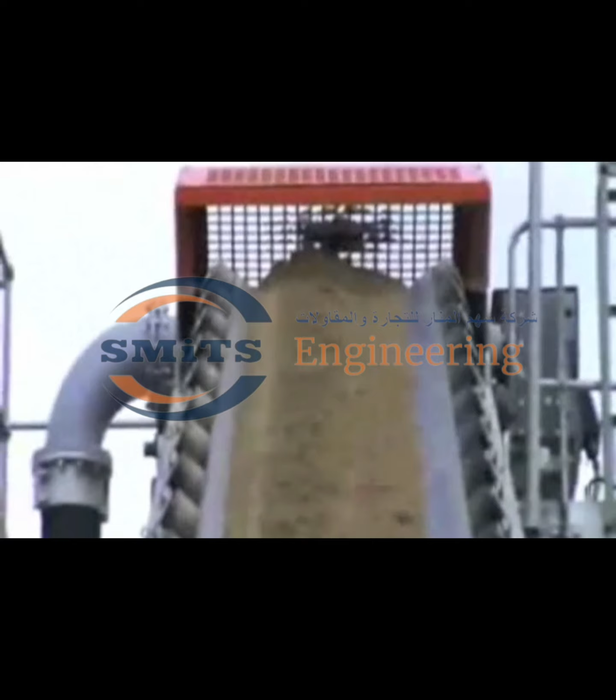AASHTO T2 and ASTM D75 are the standard practice for sampling aggregates.

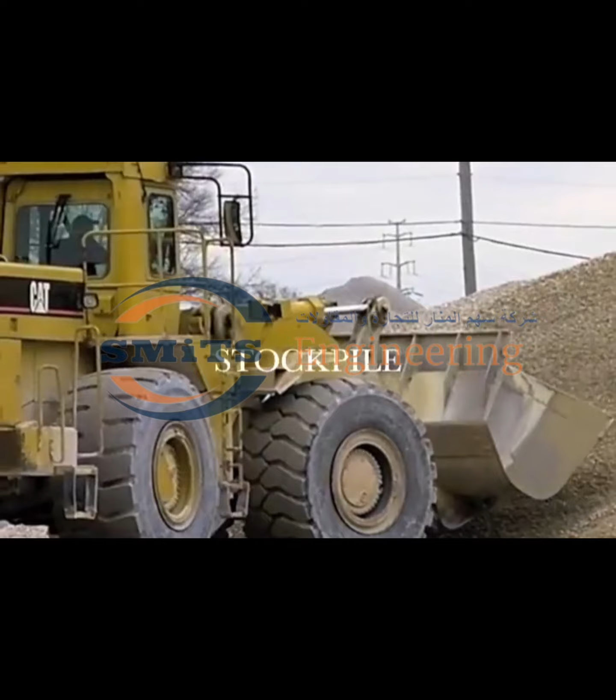Some of the purposes of obtaining samples would include acceptance or rejection of materials, control of operations at the site of use, control of the product at the source of supply, or preliminary investigation as a potential supply.

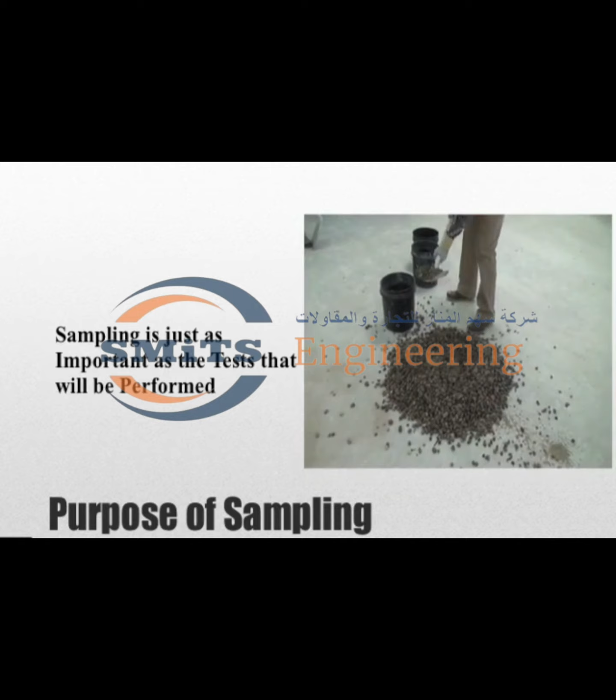Sampling is just as important as the actual testing. Therefore, the person obtaining the sample should take every necessary precaution to ensure that the sample they obtain shows the true nature and condition of the material being sampled.

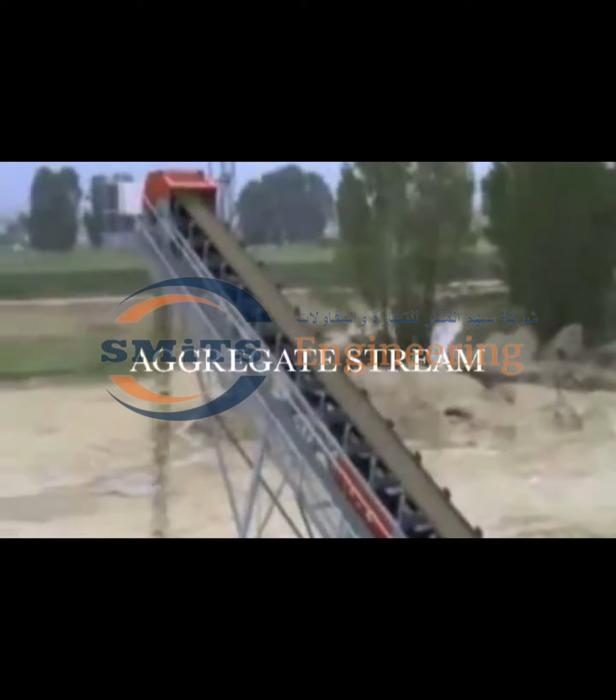There are many locations from where a sample might be obtained, but the four primary locations include a flowing aggregate stream, a conveyor belt, a stockpile or transportation unit, and a roadway from the base or the subbase.

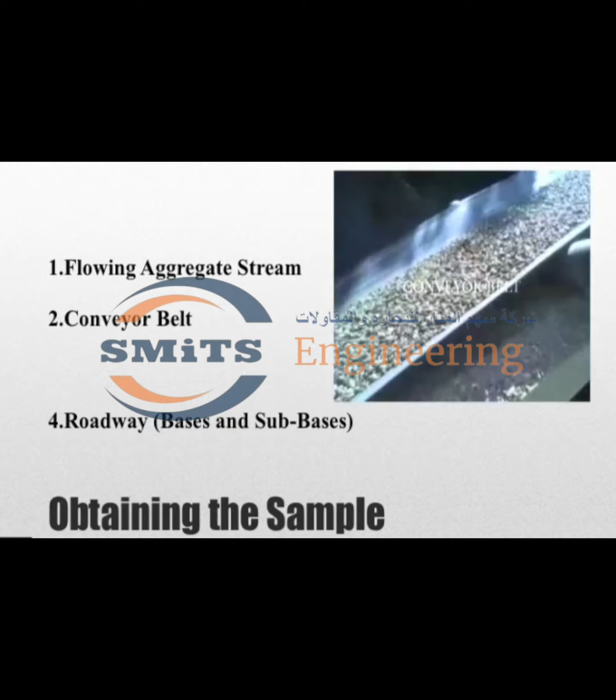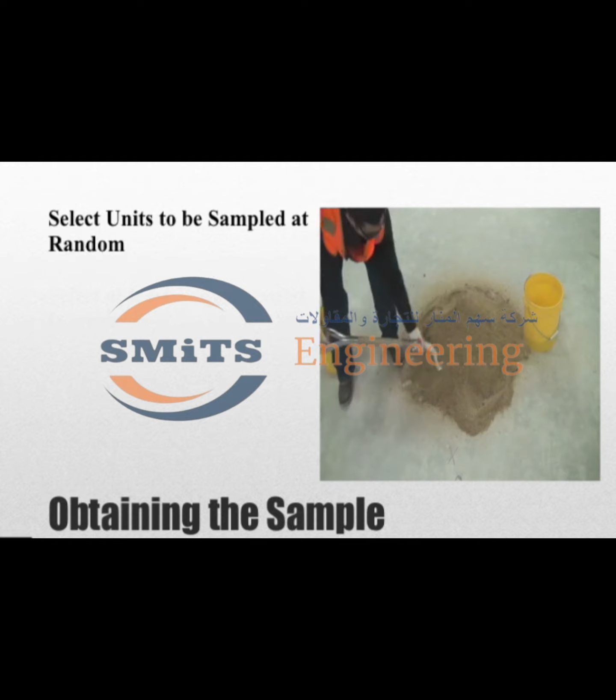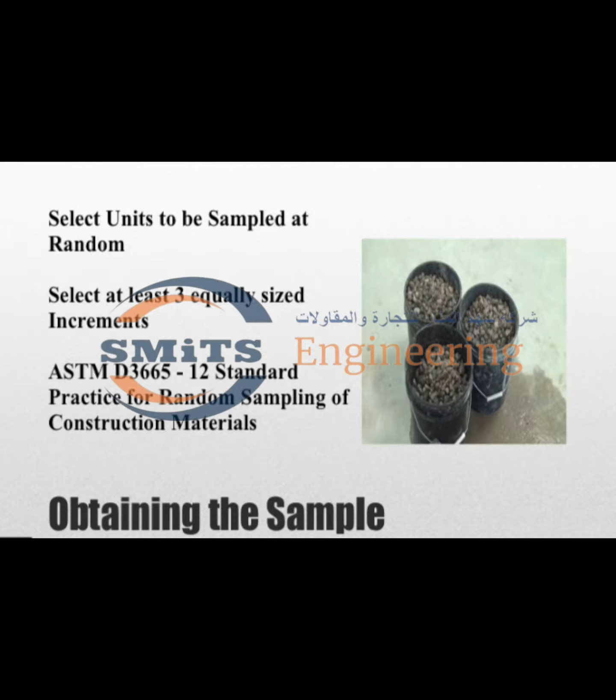Sampling from a flowing aggregate stream, sampling from a conveyor belt, and sampling from a roadway share some commonalities in the fact that the samples will be obtained at random. Furthermore, at least 3 equally sized increments will be selected. If a random sampling plan cannot be agreed upon, ASTM D3665 standard practice for random sampling of construction materials may be helpful.

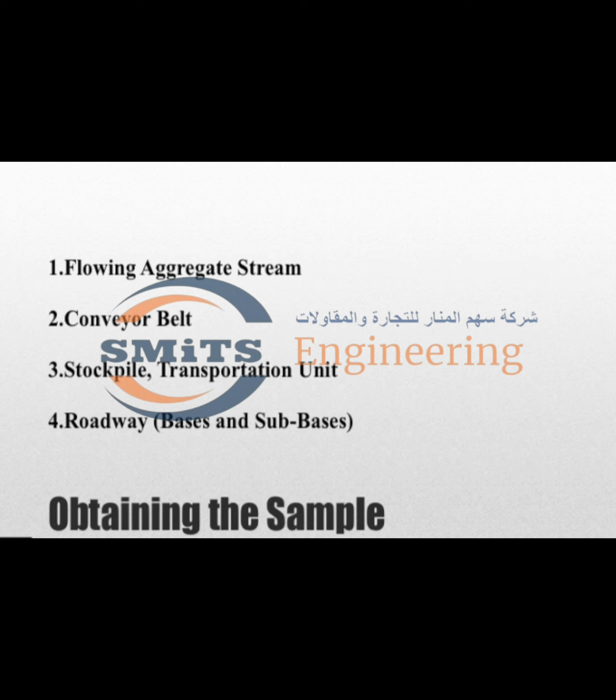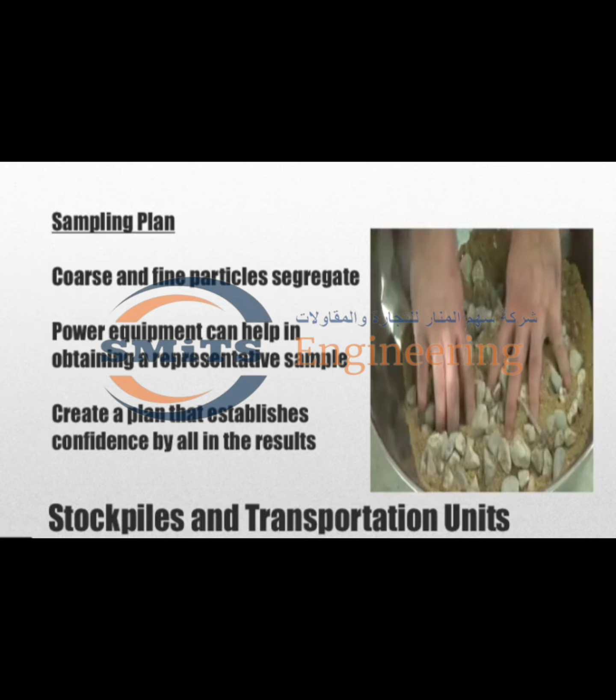When sampling from a stockpile or transportation unit, try to avoid sampling of coarse aggregates or mixtures of coarse and fine aggregates, especially when the sample is being obtained for grading purposes. If the circumstances presented make it necessary to obtain a sample of these types of aggregates from a stockpile or transportation unit, then create a sampling plan. The sampling plan should build confidence in all parties when the results are obtained. Furthermore, using power equipment may be helpful in obtaining a representative sample.

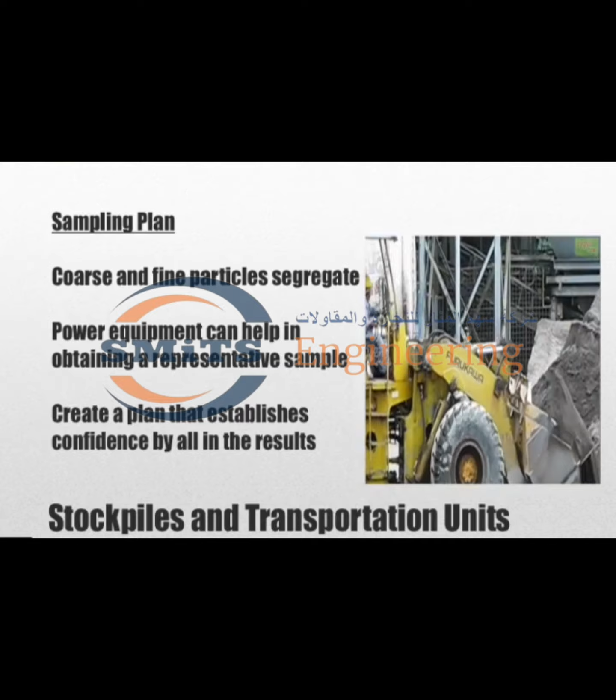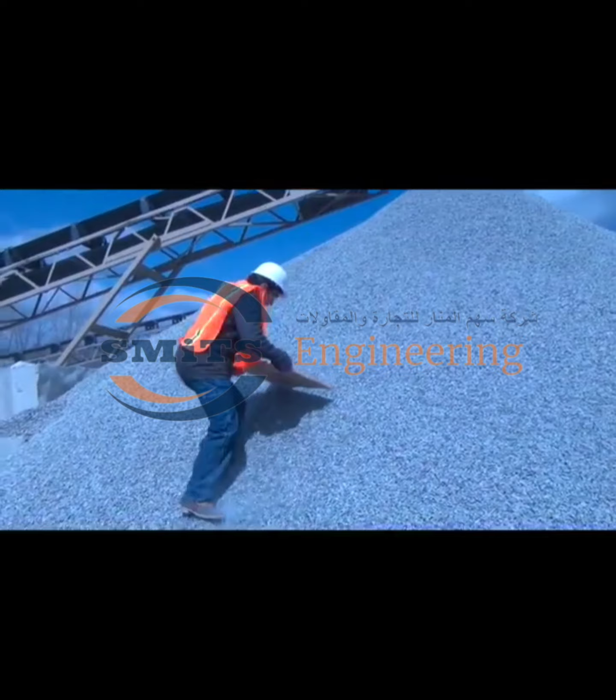When power equipment is not available, samples from stockpiles should be made up of at least 3 increments, taken from the top third, midpoint, and bottom third of the volume of the pile. A board shoved vertically into the pile just above the sampling point aids in preventing further segregation.

The responsibility for obtaining the sample will depend upon the reason for which the sample is being obtained. As an example, the manufacturer and contractor are responsible when the sample is being obtained for control of production at the source or control of work at the site. But it is the purchaser who is responsible when samples are being obtained to be used for acceptance or rejection as a potential source.

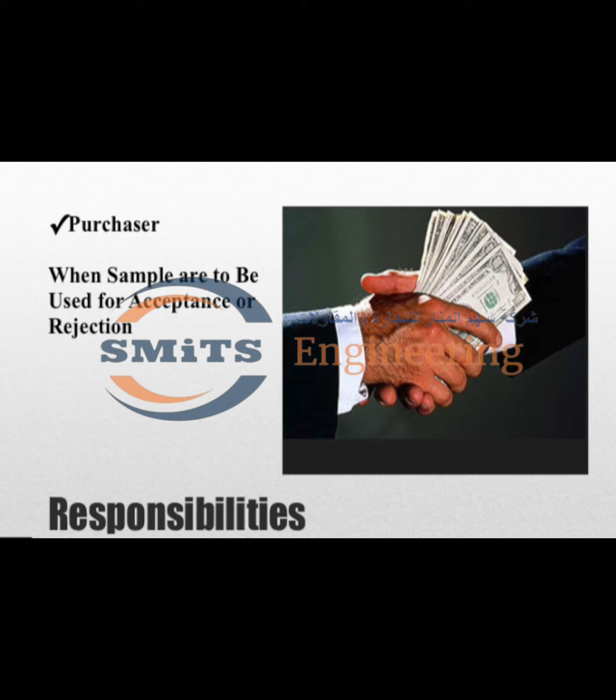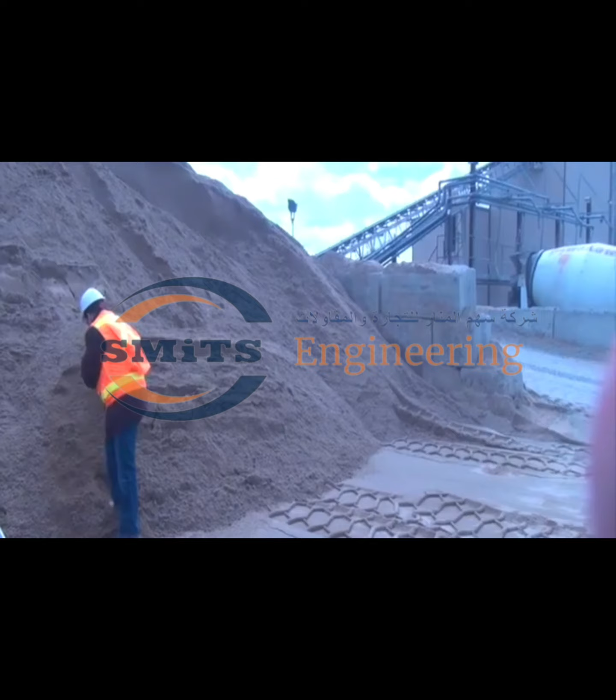And it is the seller who is always responsible for providing the appropriate sampling equipment. And whenever the sample is being obtained as part of a preliminary investigation, the sample shall be obtained by the party responsible for the development of that potential source.

When samples are being obtained for quality tests, it is best whenever possible to obtain that sample from the finished product.

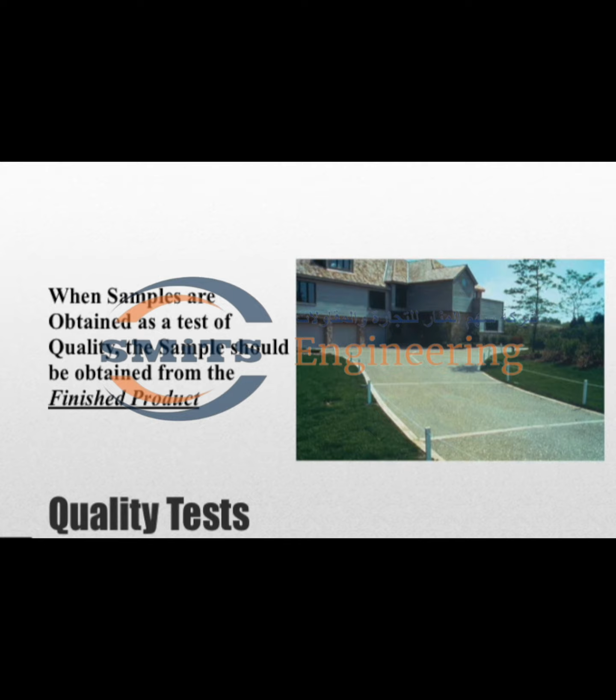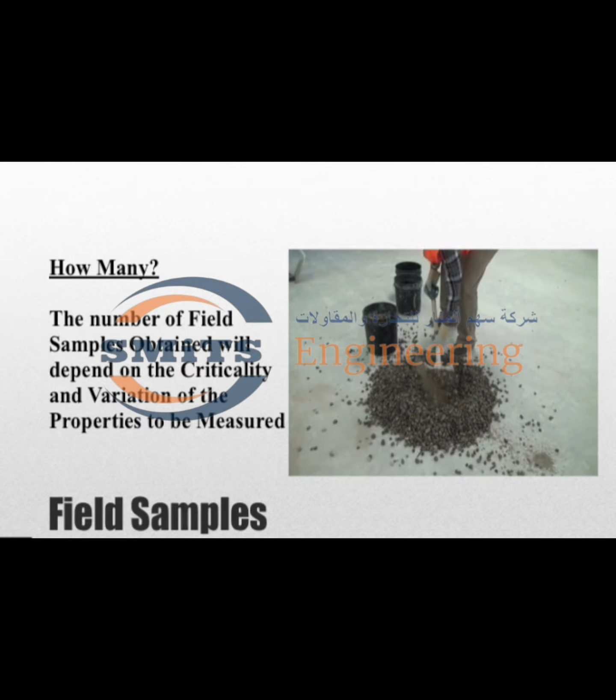The number of samples obtained will depend upon the criticality and variation of the properties that are to be measured. Furthermore, the amount of each sample will depend upon the type and number of tests that are to be conducted.

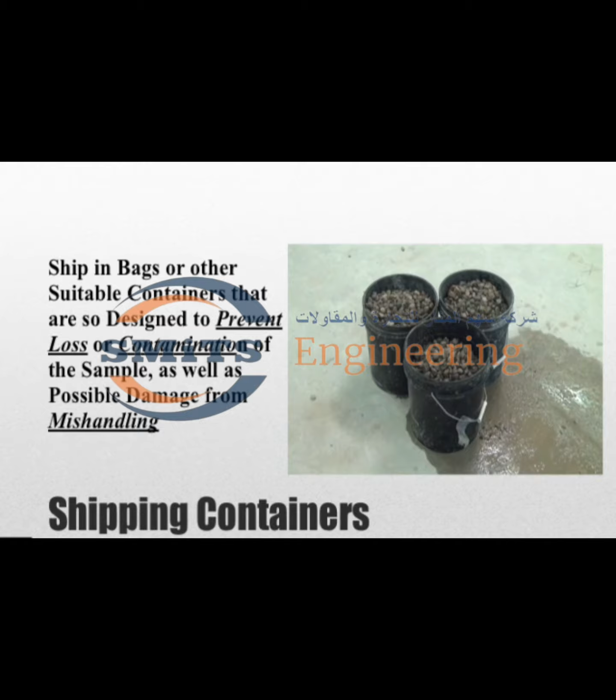And lastly, if it becomes necessary to ship our samples, be sure that they are shipped in suitable containers that are so designed to prevent loss or contamination. Furthermore, we want the containers to be suitable to prevent damage from possible mishandling.

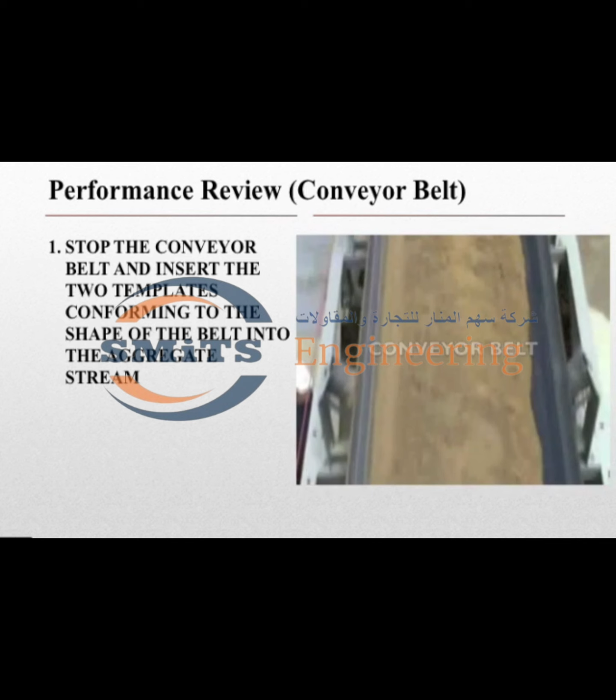Let's now review the key steps of this procedure, beginning with sampling from a conveyor belt. When sampling from a conveyor belt, one of the first things that we must do is stop the conveyor belt and insert two templates that conform to the shape of the belt. Space the templates so that the material in between will yield an increment of the required mass.

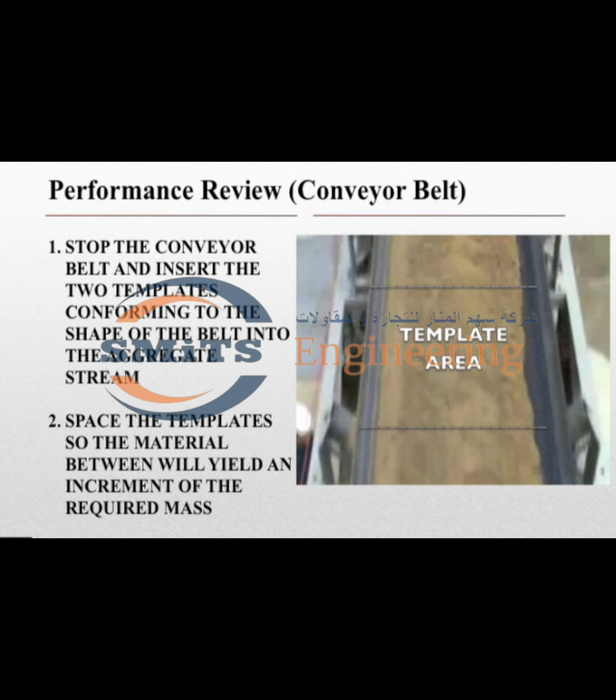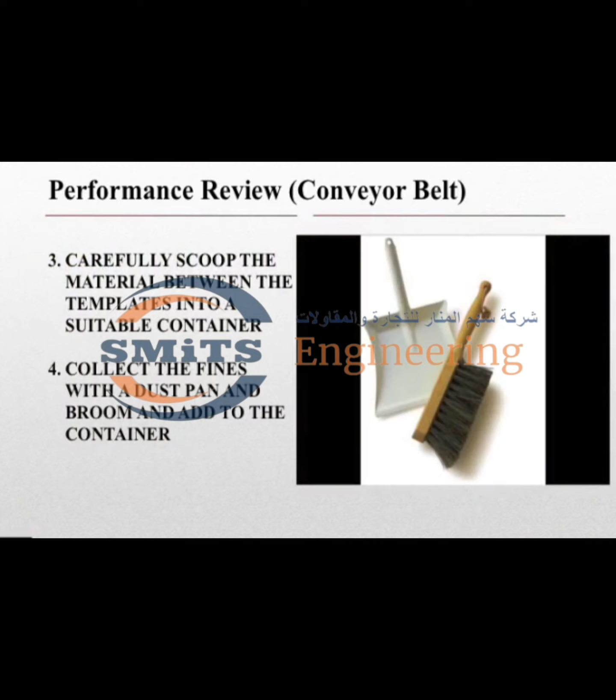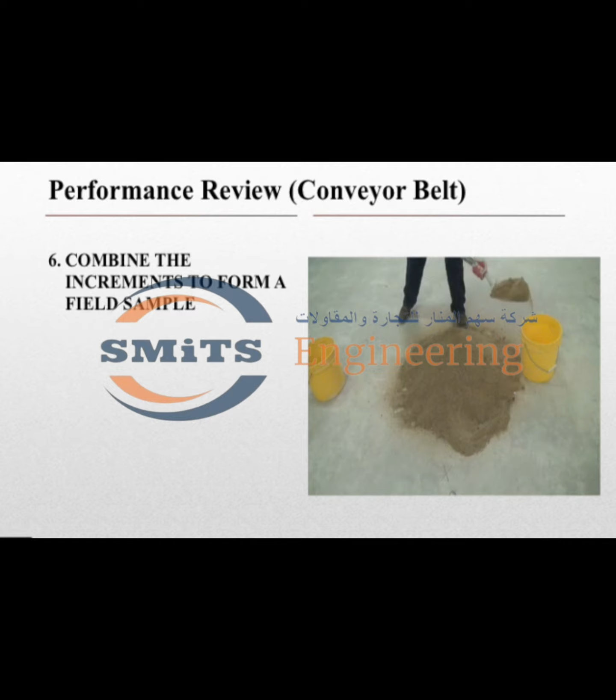Carefully scoop the material in between the templates into a suitable container. You can now collect the fines with a dustpan and broom. Be sure to obtain at least 3 equal increments and then recombine these increments to form your field sample. Lastly, make sure that your sample meets or exceeds that which is required for a given aggregate size.

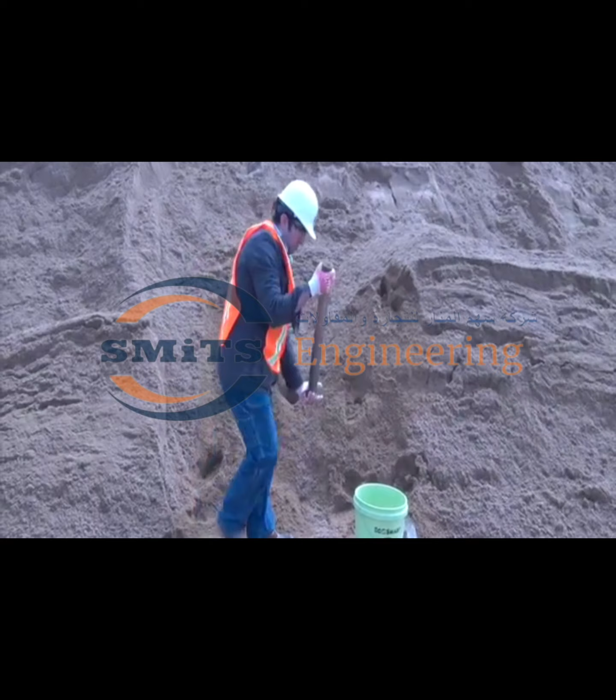Now let's review sampling from a stockpile. This is for fine aggregate only. First, remove the outer layer of the stockpile to expose the material underneath. You can use a shovel or power equipment to achieve this. Insert the appropriate sampling tube. And unlike the other procedures, when sampling from a stockpile, you obtain at least 5 increments.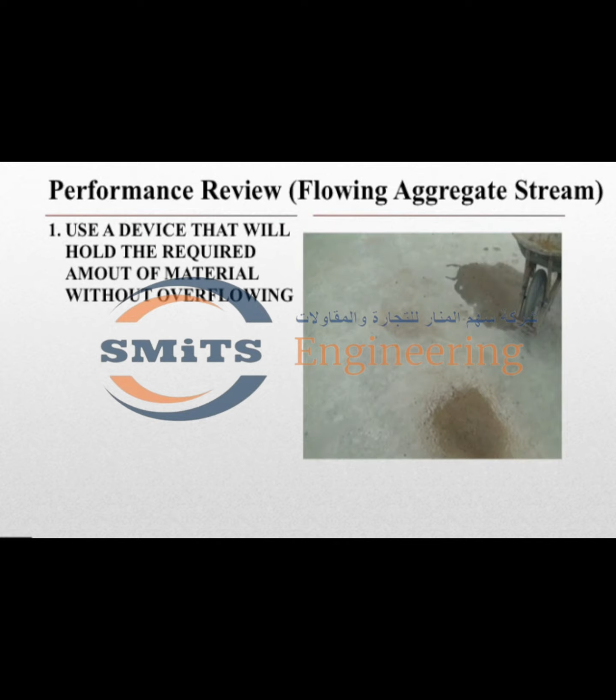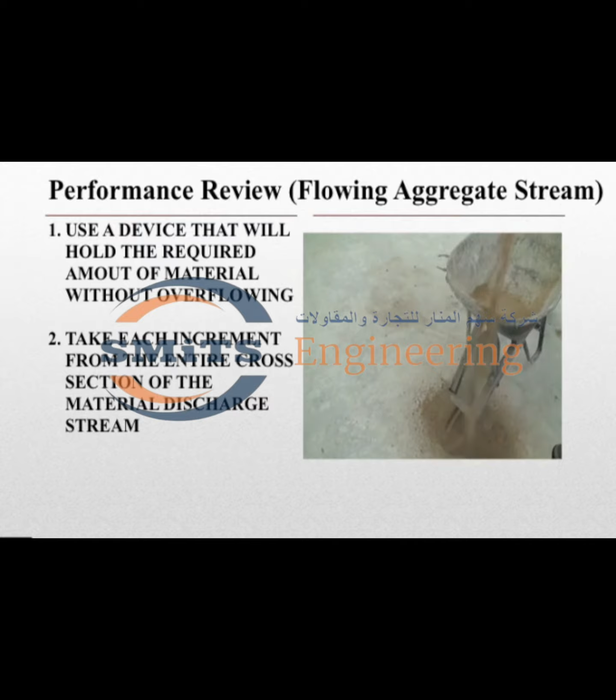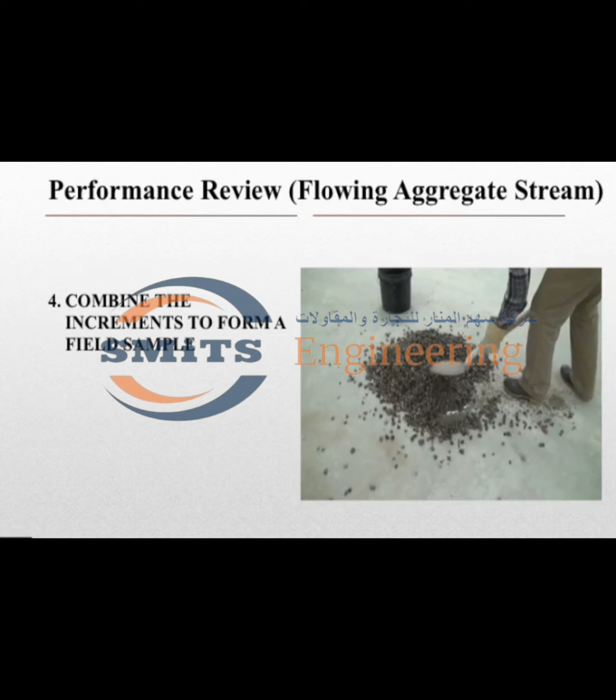Let's now review sampling from a flowing aggregate stream. Be sure to use a device which will hold the required amount of material without overflowing. Take each increment from the entire discharge stream. Obtain a minimum of 3 equal increments. Then, just as before, combine these increments to form your field sample. Then ensure that the size of the sample meets or exceeds that which is required for a given aggregate size.

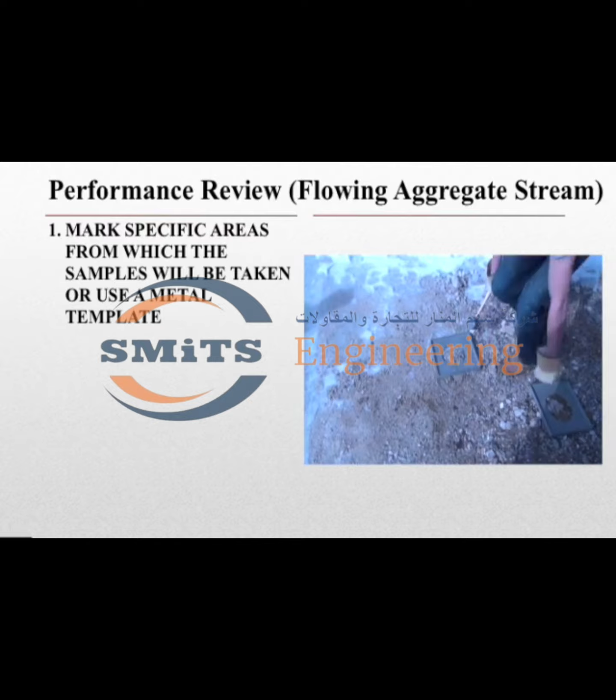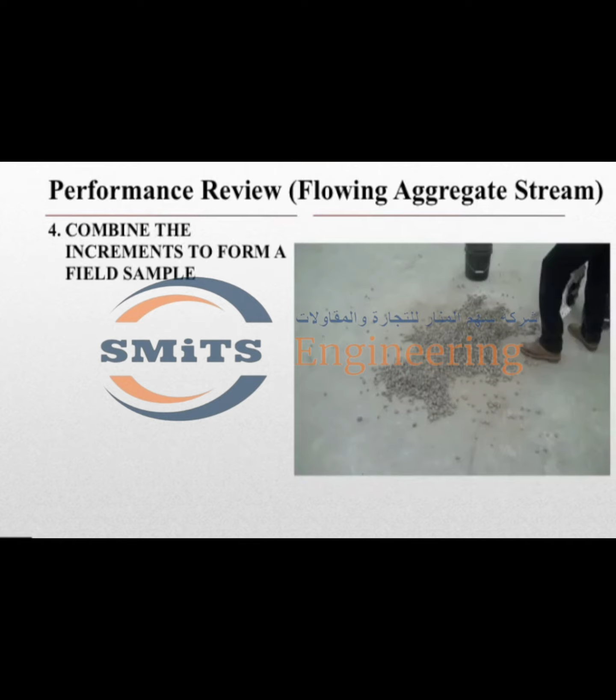Lastly, let's summarize sampling from a road base. First, you'll need to mark the specific areas from where the samples will be taken, or use some type of a metal template. Get the sample from the entire depth and exclude the underlying material. We now want to combine our increments to form our field sample, and just as before, ensure that the size of the field sample equals or exceeds that which is recommended.

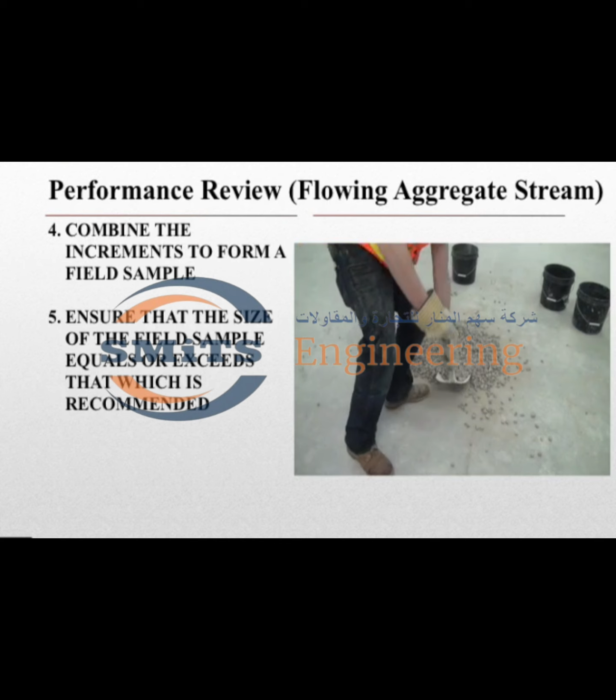There are no significant differences between AASHTO T2 and ASTM D75. And this will conclude AASHTO T2 and ASTM D75 standard practice for sampling aggregates.